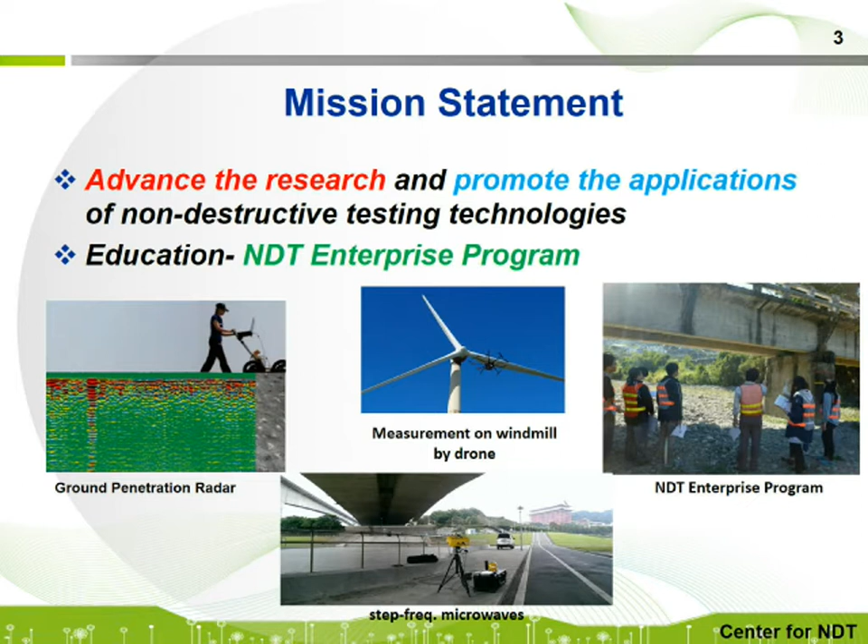The mission statement. There are two missions for our center. The first one is to advance the research and promote the applications of non-destructive testing technologies. The second one is education, which refers to the NDT Enterprise Program. General information. First, I would like to talk about the history and the revenue.

The Chaoyang University of Technology was founded in 1994. Because several professors in our department have specialties related to civil NDT, we started the Center for NDT in 2005. In 2014, the name of the center changed to Research Center for NDT because it became one of the research centers supported by the university. The annual commissioned budget averaged 10 million NT dollars for recent years.

The projects conducted by our center include testing targets of tunnel, embankment, bridge, reservoir, building, pier, nuclear power station, wind turbine, highway, and airport. So they are very versatile. There are 7 main researchers in our center. Professor Chen, Professor Shi, and Professor Chang. Their specialties are in structural NDT and structural health monitoring.

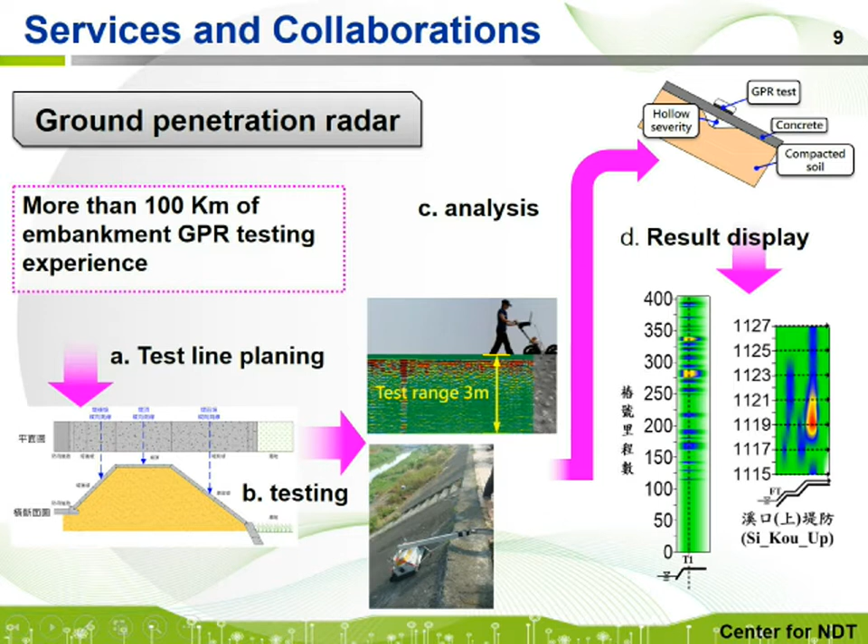An instrument called IBIS, which is a step frequency microwave interferometer, is used for bridge monitoring. IBIS can simultaneously measure the dynamic displacement of multiple points on the bridge deck. The accuracy is 0.1 mm to 0.01 mm, and the data acquisition frequency can go up to 200 Hz. So, if we monitor the vertical displacement of normal traffic for 20 minutes, the bridge modal frequency and the mode shape can be obtained.

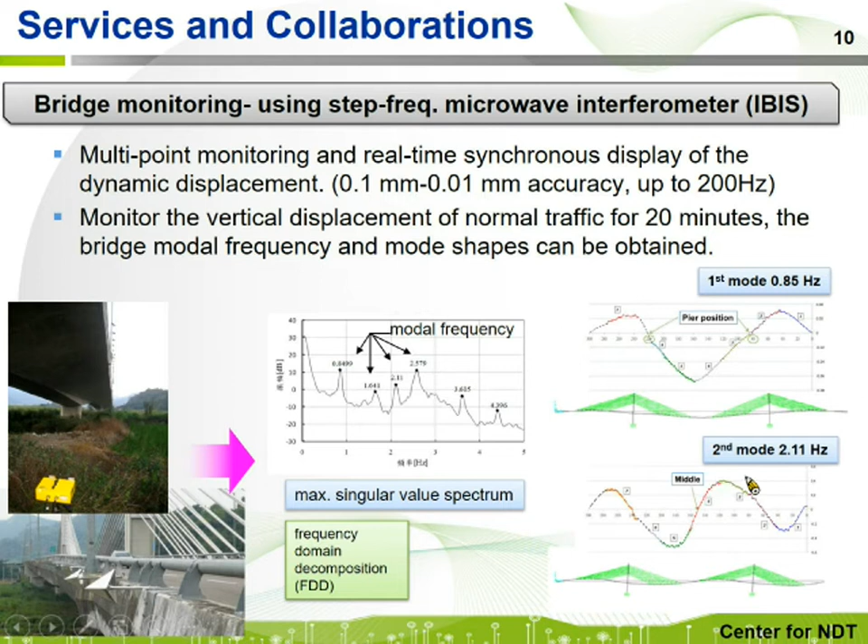We use multiple methods for tunnel assessment. We use ground penetrating radar to assess voids beneath concrete lining and use LiDAR scans to monitor the tunnel deformation, using dynamic photography and the LiDAR scan data to create the unfolded view of the anomalies in the tunnel.

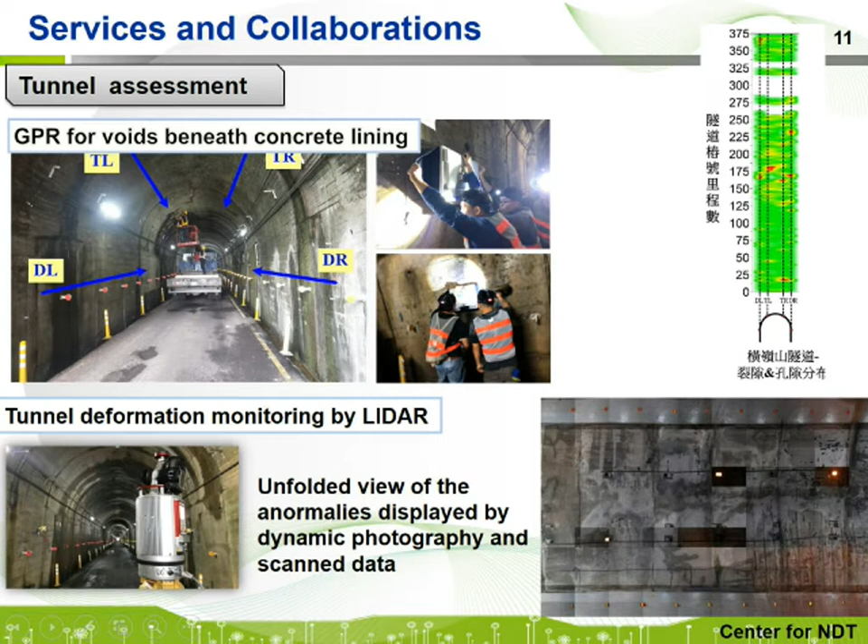For the wind turbine structural safety assessment and monitoring, two non-contact monitoring methods were applied. We use a UAV carrying an infrared camera and a regular camera to fly around to visually inspect damages on the pillar and rotor. And we use the microwave interferometer placed under a pillar to check the mode shape and the vibration mode frequency of the pillar.

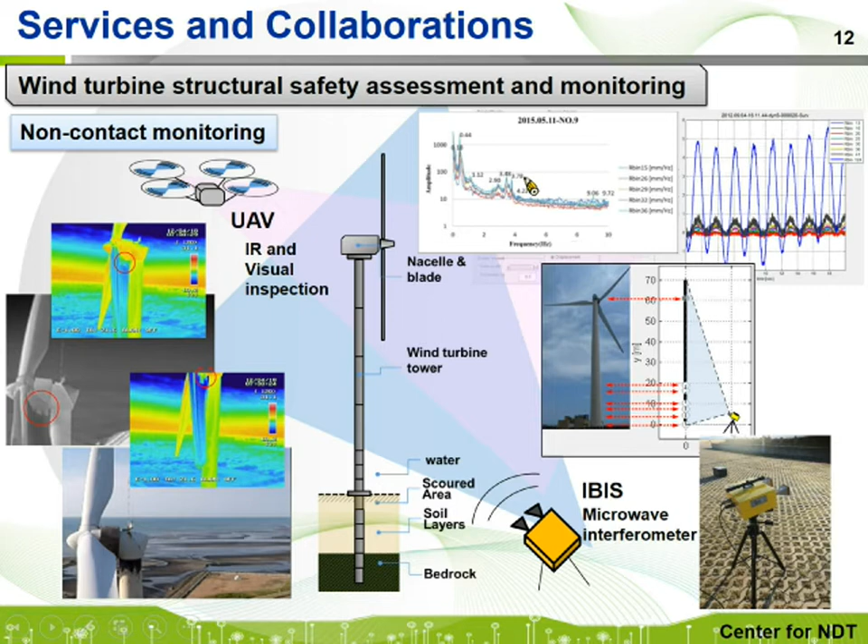I would like to introduce two innovative stress wave methods developed in our center to assess the debonding at the steel-concrete interface, for cases such as concrete-filled steel tube damaged by fire, and not fully filled epoxy resin for factory floor strengthening by steel plate, or the weir strengthened by steel plate.

One method is to place the small hammer impactor away from the receiver to obtain the Lamb wave modal vibration and use the difference of the A0 mode dispersion curve of the steel plate to assess the debonding. The second one is to place the hammer close to the receiver and use the amplitude of the peak in the normalized amplitude spectrum to examine the voids underneath the steel plate.

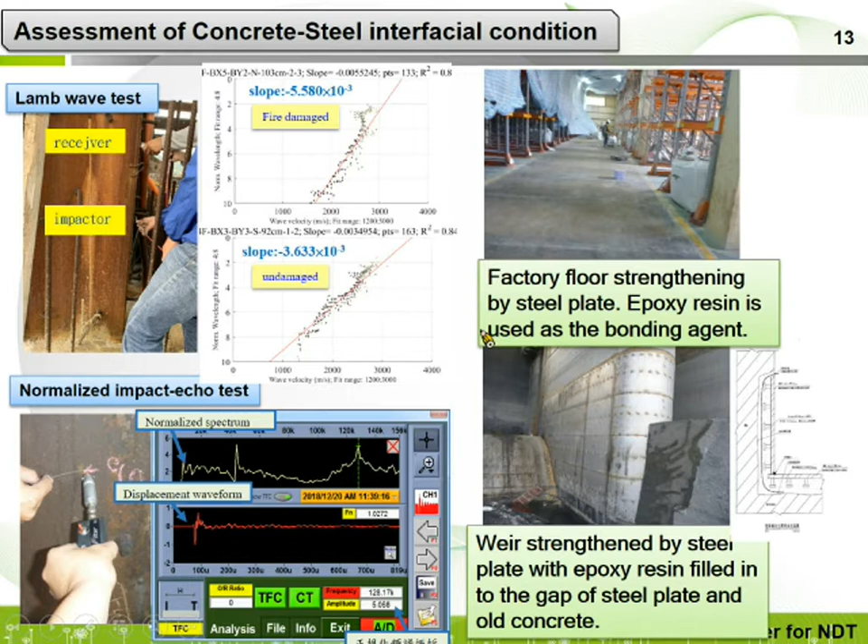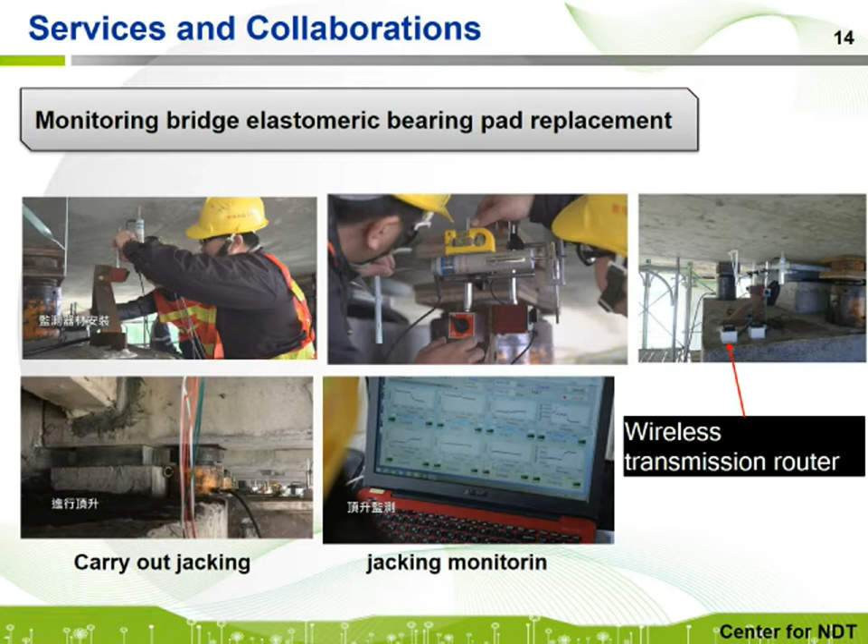Conducted many cases of monitoring replacement of bridge bearing pad during jacking up the bridge girder. Worth to mention is that wireless transmission routers were applied to transmit signals of the displacement sensors to the computer, so that the monitoring becomes quite easy without connecting a large number of electric wires.

For the ongoing research projects, first is the project funded by the Ministry of Science and Technology. In the project, we assessed the depth of the damage for the reinforced concrete after fire using the dispersive characteristic of Rayleigh wave group velocity. We use one impacting hammer and a displacement receiver or a microphone to obtain the Rayleigh wave, and use short-time Fourier transformation and reassign method to obtain the dispersive curve. And after the proper inversion process, we can get the velocity profile with respect to depth. So the damage depth after fire can be assessed.

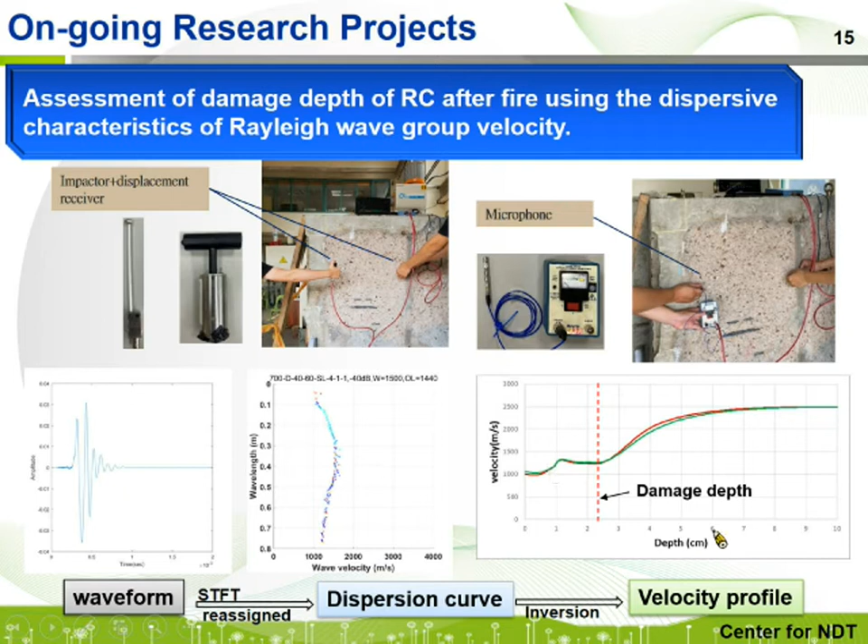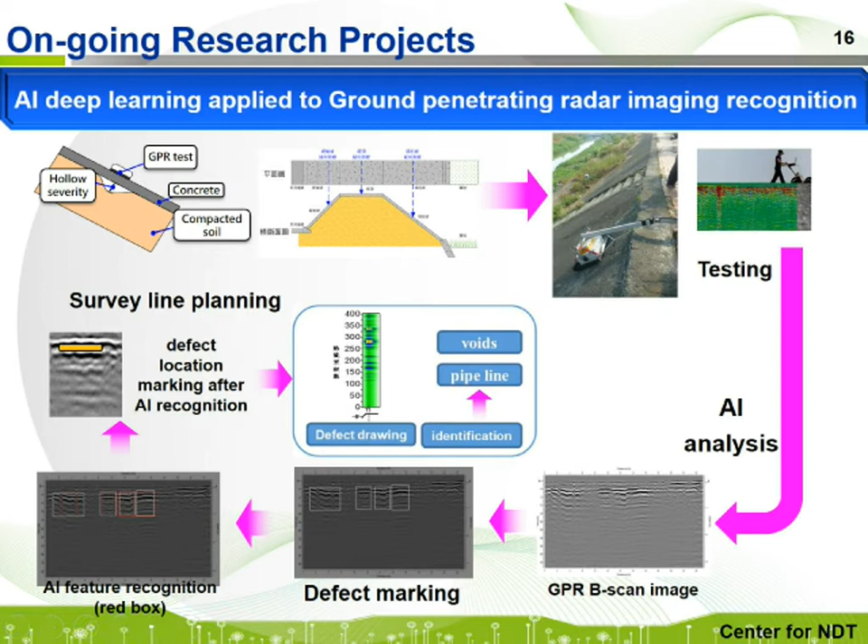Second project is funded by National Chung-Shan Institute of Science and Technology, using AI deep learning on ground penetrating radar imaging recognition for embankment assessment. Ongoing research project is to apply digital image correlation (DIC) to monitor wind turbine pillar. The preliminary research was conducted in lab using 2 digital cameras to measure the 3D movement of a pillar with multiple marks and multiple defects, using the modal difference index to identify the severity and the location of the defects.

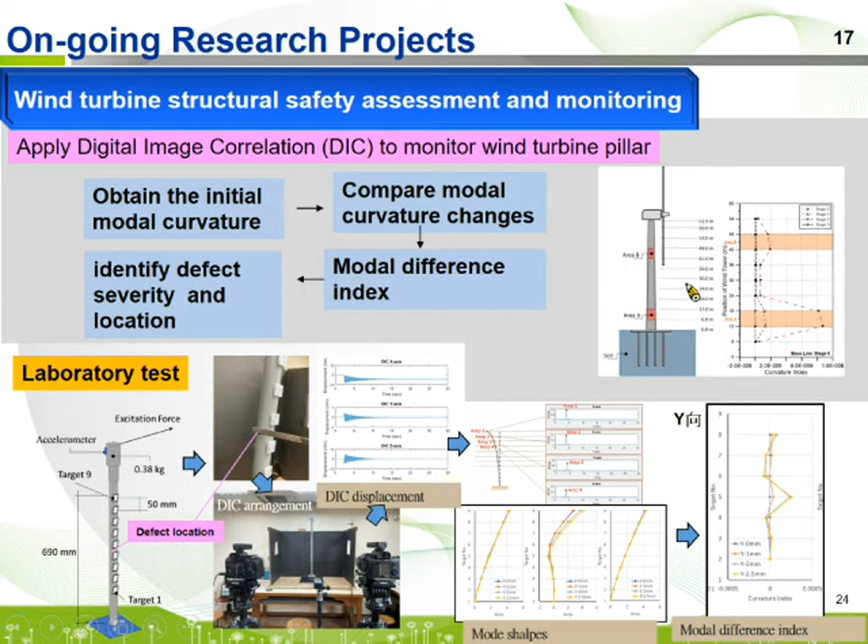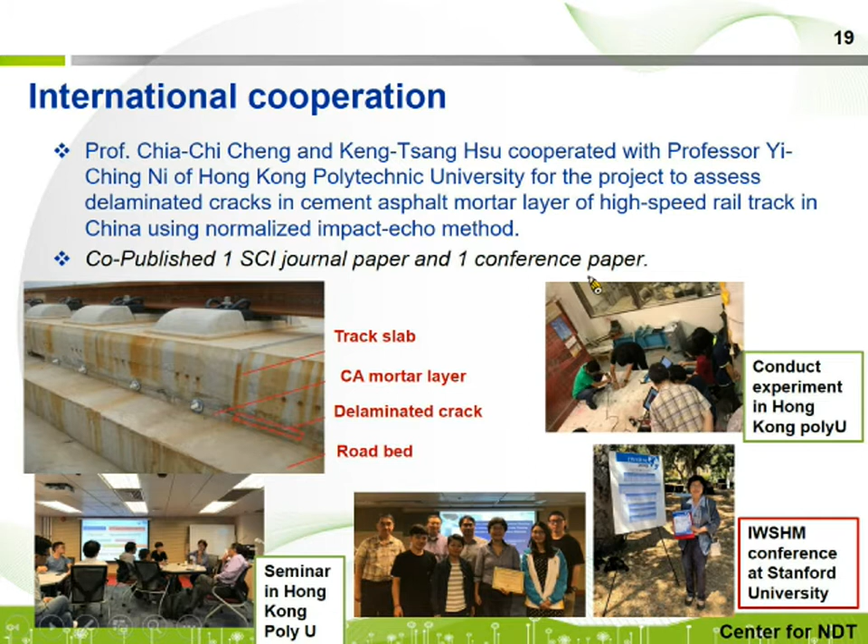For the international cooperation, Professor Chia-Chi Cheng and Keng-Tsang Hsu cooperate with Professor Yi-Ching Ni of Hong Kong Polytechnic University for the project to assess the delaminated cracks in cement asphalt mortar layer of high-speed rail tracks in China using normalized impact echo method. So we went to Hong Kong Polytechnic University to conduct experiments, and Professor Chia-Chi Cheng offered a seminar with the group in Hong Kong Polytechnic University. Also, we have published one SCI journal paper and attended a conference at Stanford University and published one conference paper.

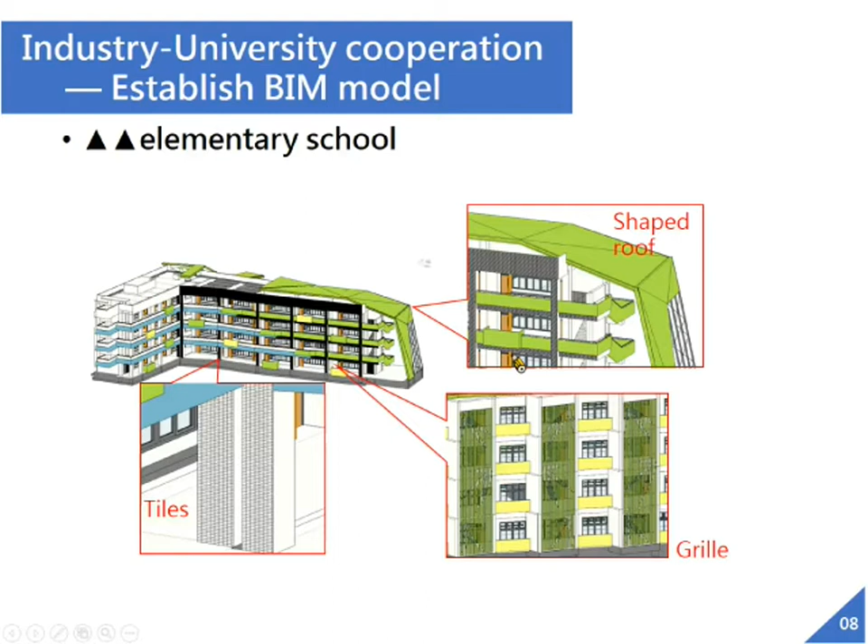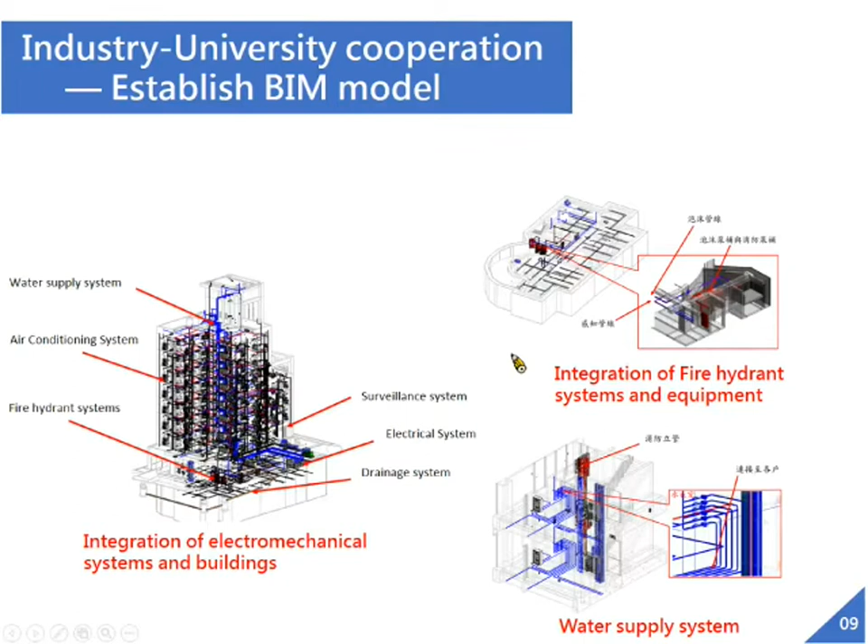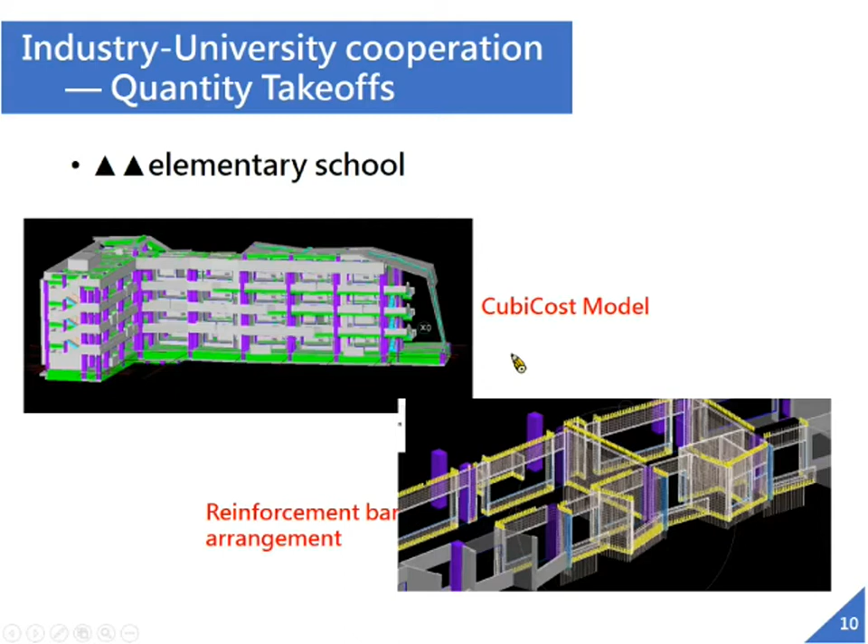This is a case about BIM model establishment. The general contractor used the BIM model to detect the clash and discuss the details of the building, like the tiles, like the shaped roof. What is more important is the integration of the electromechanical model and the structural model. It is because the electromechanical engineering is more complicated than structural engineering in practice. So with the BIM model, all parties can understand in advance how to arrange the electromechanical pipelines. In addition to viewing 3D models, BIM model can also be used for quantity takeoffs. The calculation result can assist the owner or the general contractor to evaluate the project budget quickly.

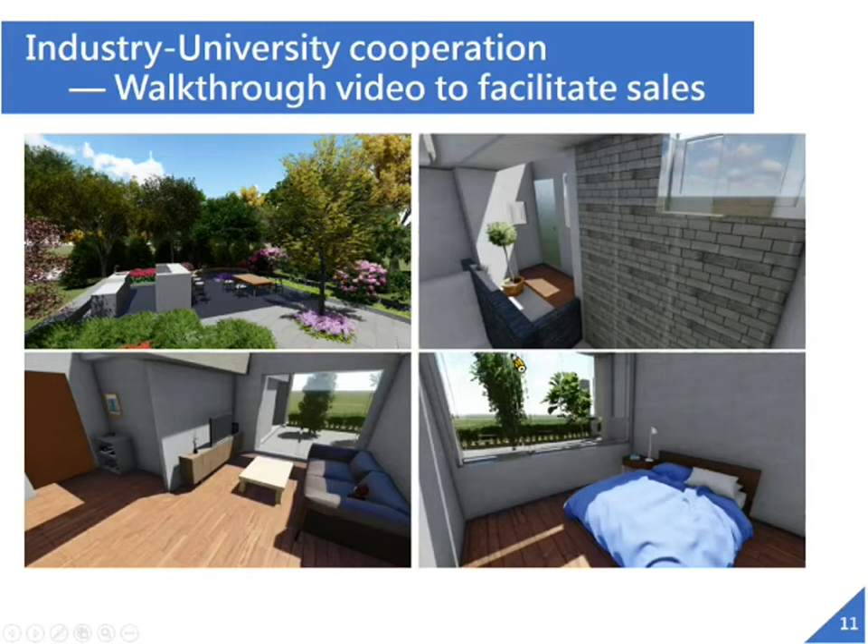And the 3D animation is also an important function of BIM. It can show the expected view and environment, and this can help the owner or the customer foresee the building before completion. Here we have a video showing the 3D animation made from the BIM model.

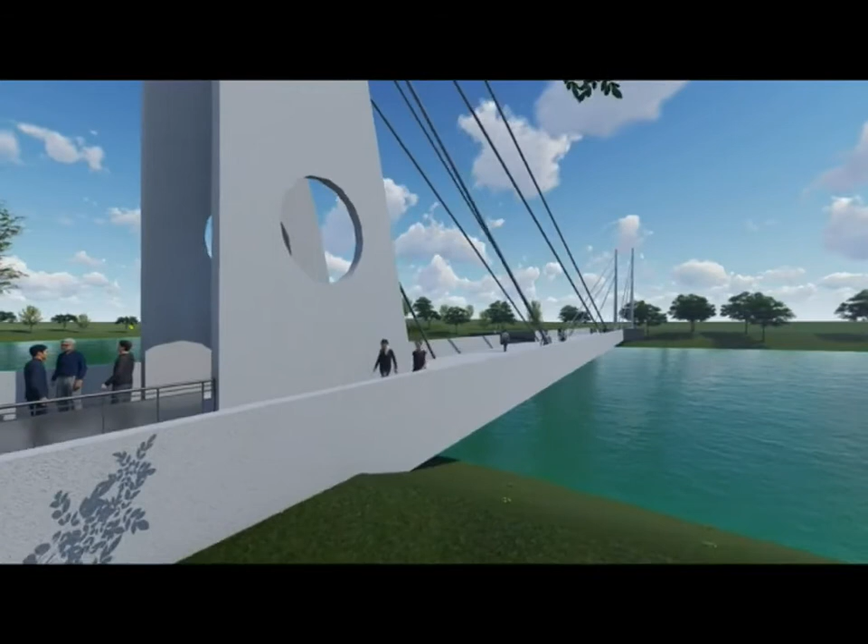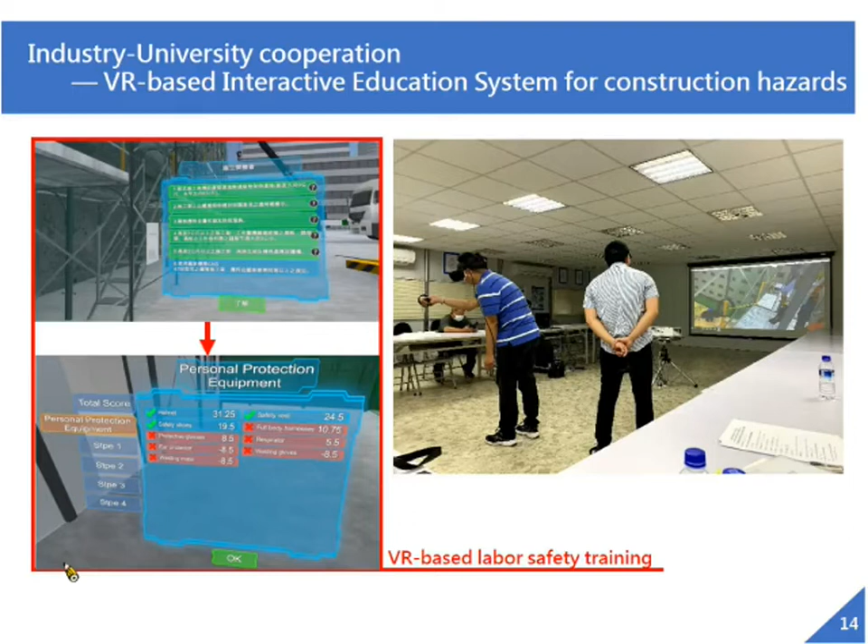Okay, in addition to BIM, our center is also actively developing VR-related technologies. We developed a VR-based interactive education system for construction hazards. By using this system, laborers on the construction site can learn hazard knowledge with a realistic scene. This is a part of the system showing the VR environment. We can see the video below to learn more.

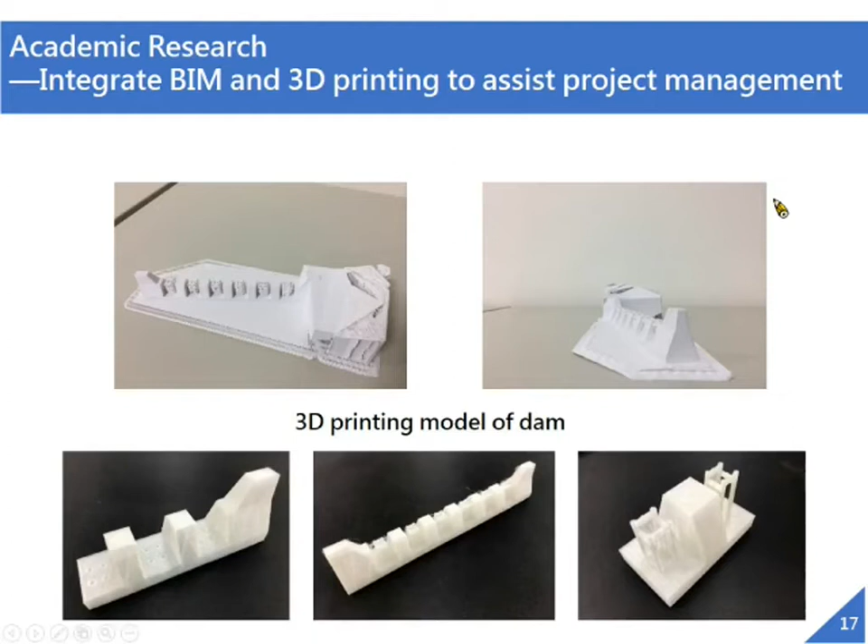It's an important part, and now we move to the second part, academic research. Our research is BIM and VR related. We'll introduce some of them below. This one is about integrating BIM and 3D printing. We try to transform a BIM model into a 3D printing model. When we print the virtual model out, the laborers can discuss how the facilities can be assembled, so it can facilitate the construction process.

Also, we developed a BIM and VR-based cost estimation system. When a change order occurs in a construction project, we usually need almost 2 weeks to estimate the cost of the change order. By using this system, customers can see the changes in the VR environment directly, so that the customers can know if the changes meet their requirements or not. When the change is done, the cost of the changes can be calculated automatically, so it can save lots of time.

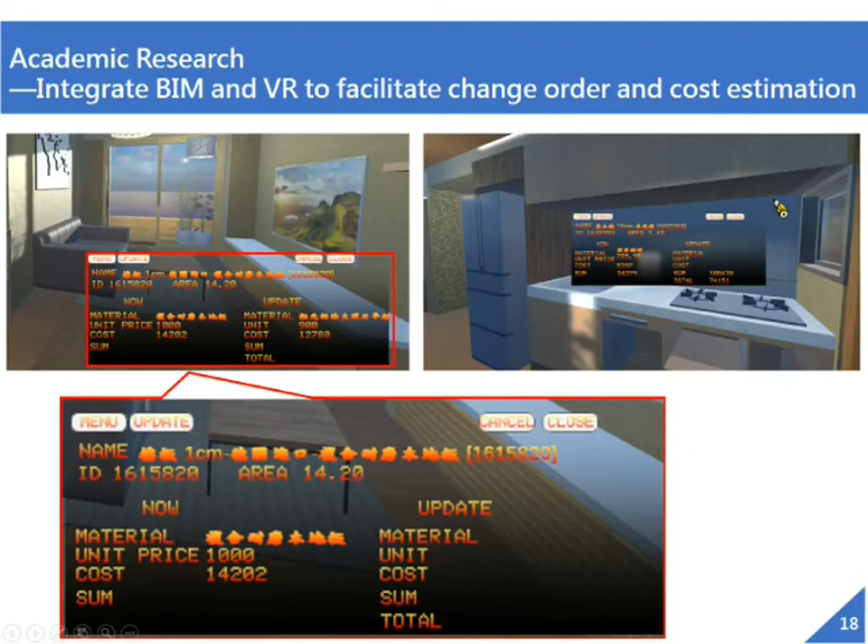In the study of 5D simulation based on BIM and VR, a cost and schedule management model is developed. First, a BIM model is linked with the schedule activities to simulate the construction process. Then the cost items are integrated into the 4D simulation to develop the progress curve. In addition, this research further presents the model in the VR environment.

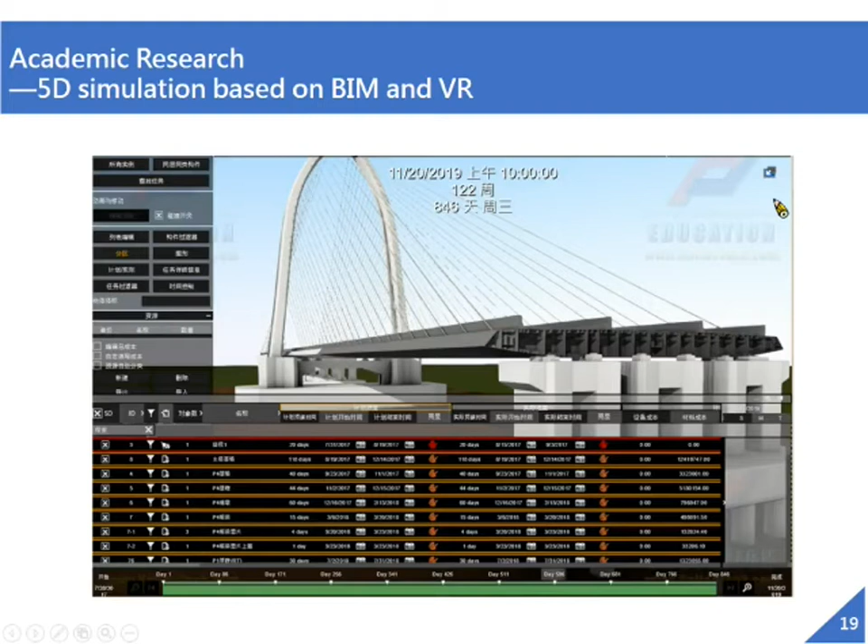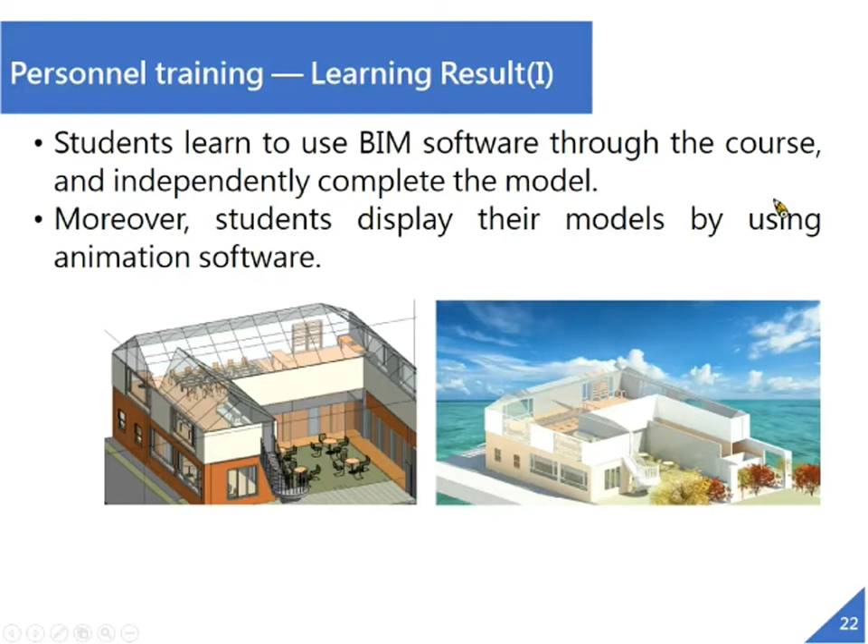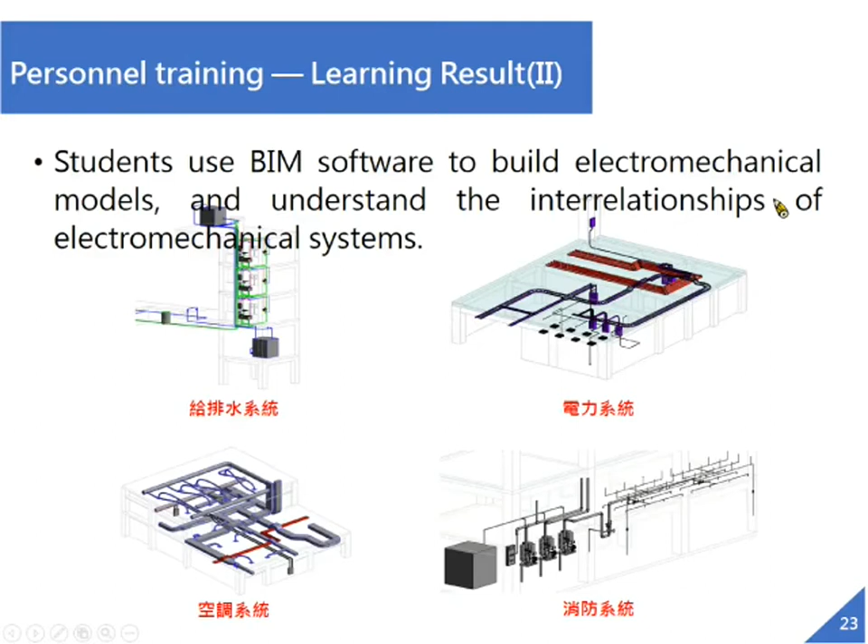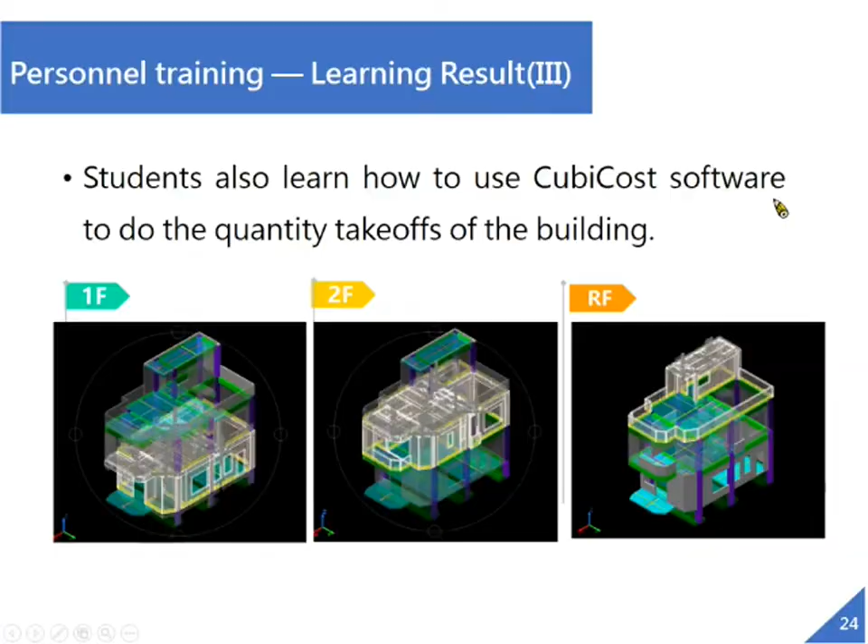Also, students use the Cubicost quantity takeoff software. They build a BIM model and then do the quantity takeoff to calculate the cost of the building model. That's all about the BIM Center in the Department of Civil and Construction Engineering.

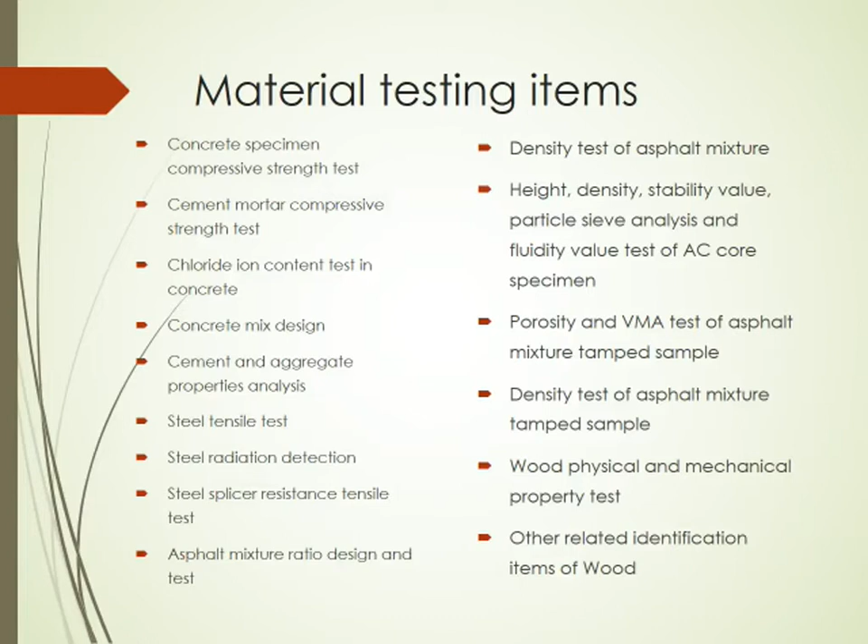Material test items. Now we're doing concrete compressive strength tests, cement mortar compressive strength tests, chloride content tests in concrete, concrete mix design, cement and aggregate property analysis, steel tensile tests, steel radiation detection, steel splicer resistance tensile tests, asphalt mixture ratio design and tests, and all the other items.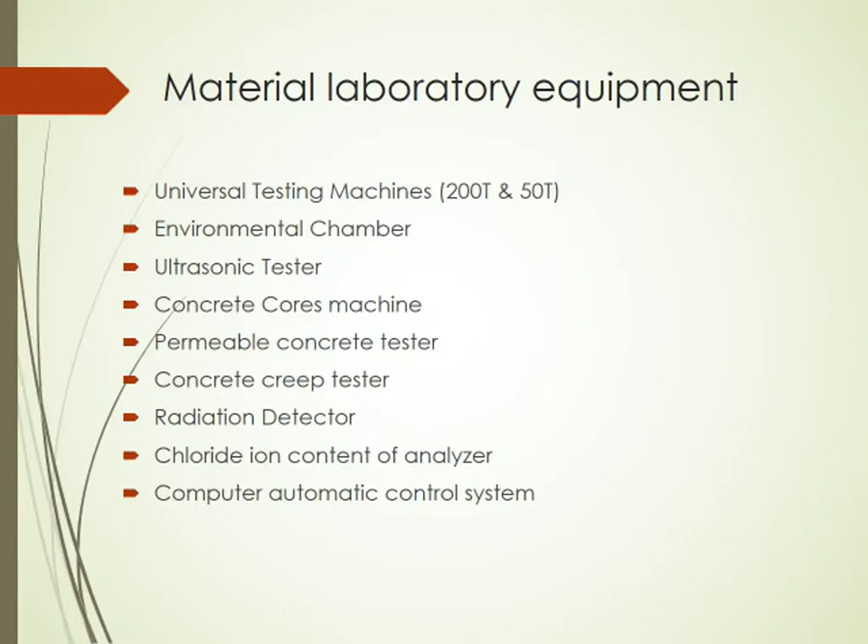Now we introduce our universal testing machines, 200 tons and 50 tons. A universal testing machine is a machine that allows samples to be tested in pure tension or pure compression. The universal machines in the materials lab have several different couplers that allow different types of loading conditions.

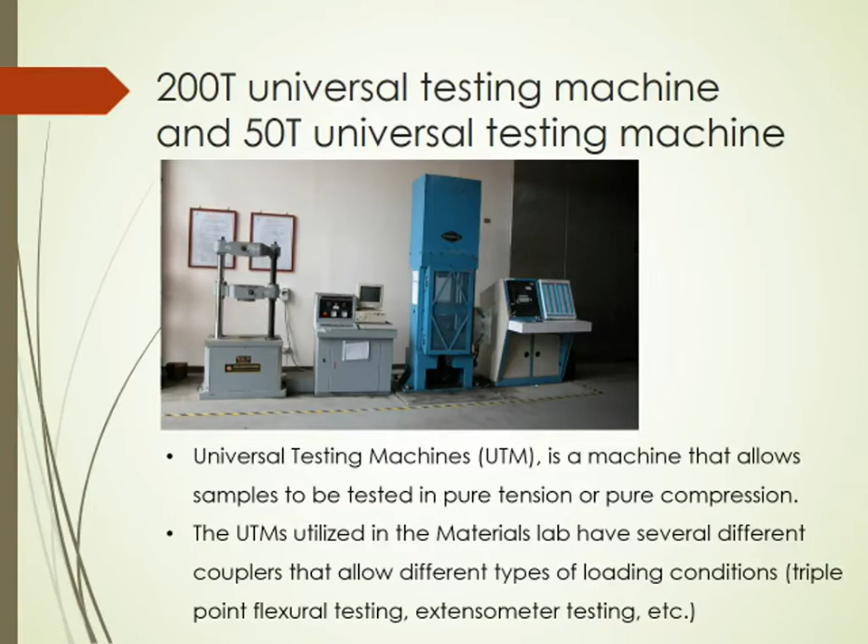Environmental chamber. The environmental chamber is capable of controlling temperature as well as humidity. It has a temperature range of -4 to 212 degrees Fahrenheit, with a temperature constancy of ±0.5 degrees Fahrenheit. The chamber also has a humidity range of 10 to 95%, depending on ambient temperature and humidity, with an accuracy of ±2.5%.

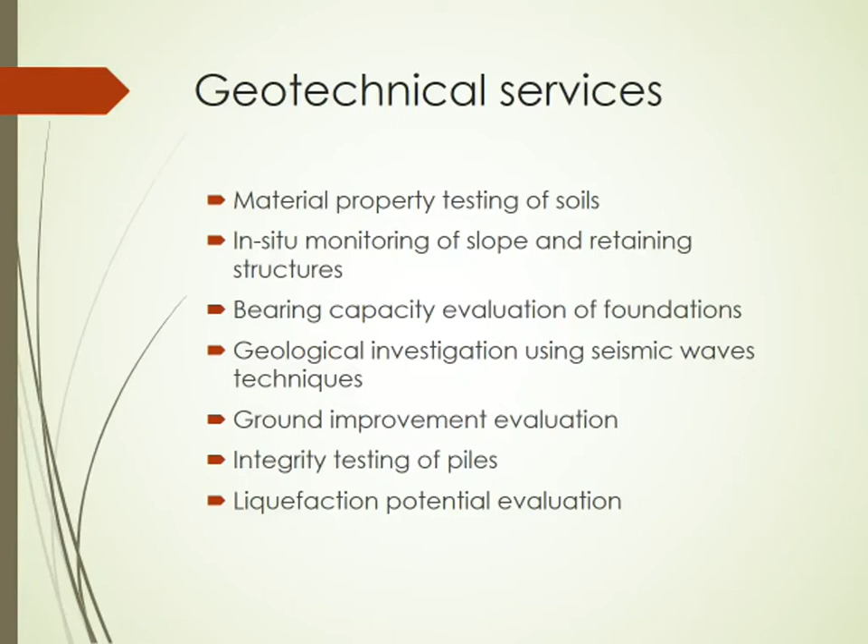Now let's talk about our geotechnical services. We have material property tests of soils, in situ monitoring of slopes and retaining structures, bearing capacity evaluation of foundations, geological investigation using seismic wave techniques, ground improvement evaluation, integrity tests of piles, and liquefaction potential evaluation.

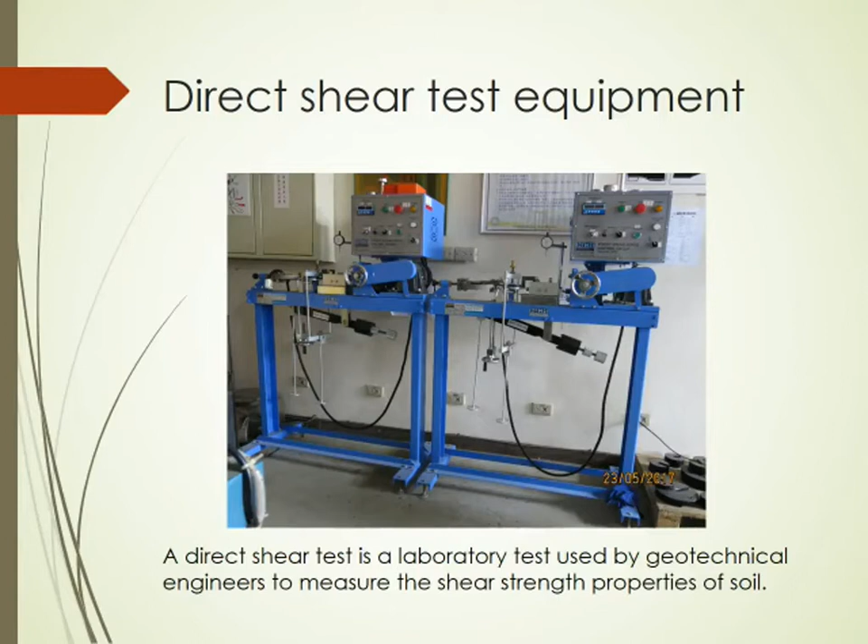This is direct shear test equipment. A direct shear test is a laboratory test used by geotechnical engineers to measure the shear strength property of soil. Triaxial compression test. The triaxial test of soil is widely used in geotechnical engineering. Specimens are axially loaded to failure while a confining pressure is constantly applied. As a result, the behavior of geomaterials is investigated in the three-dimensional stress state.

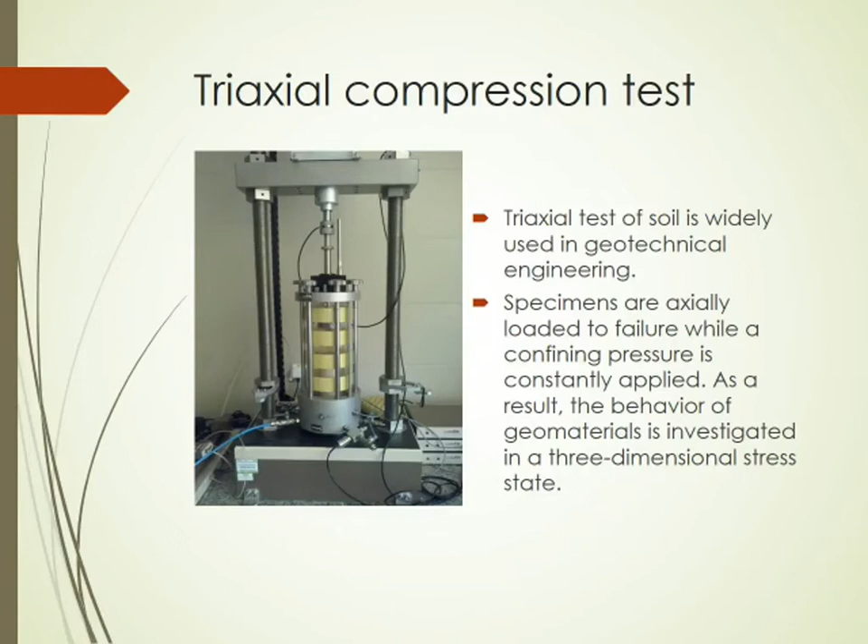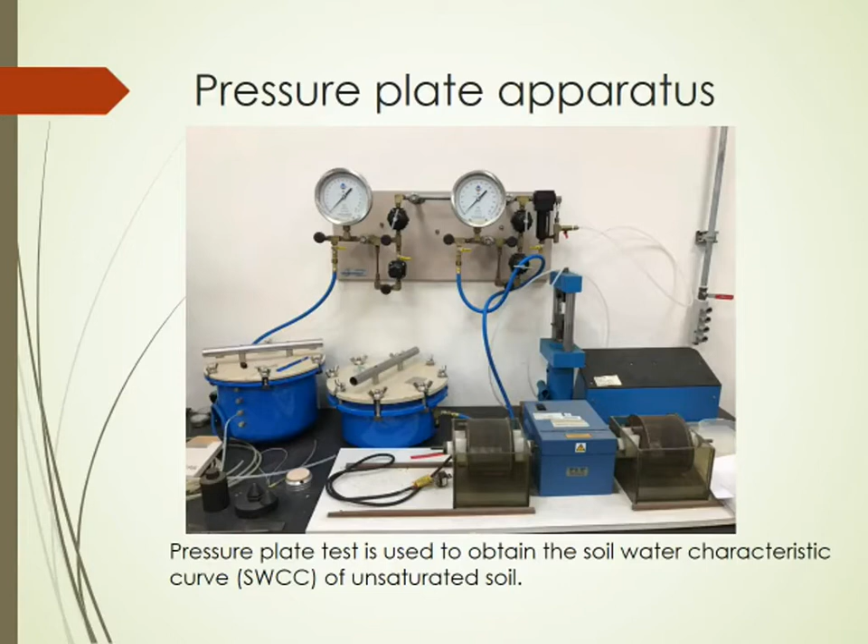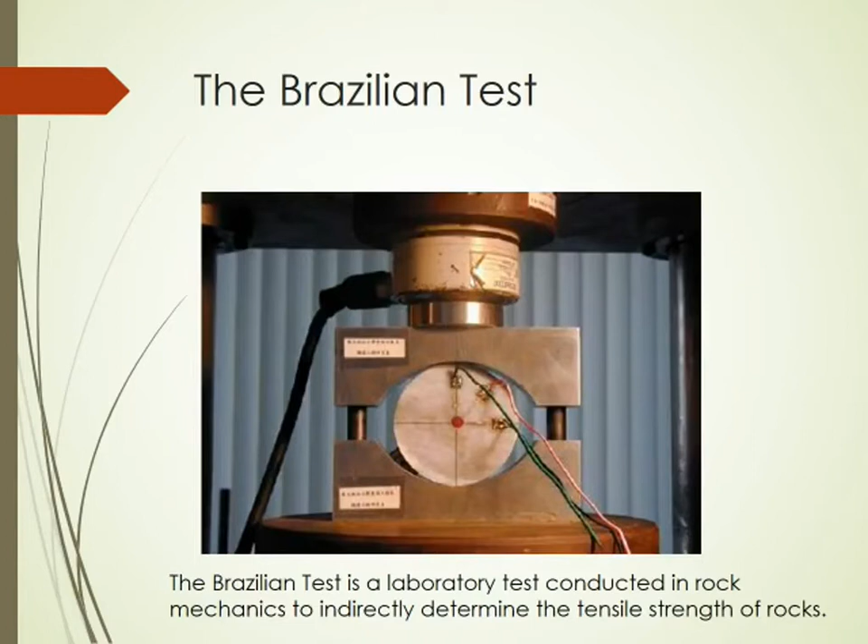This is pressure plate apparatus. The pressure plate test is used to obtain the soil water characteristic curve of unsaturated soil. The Brazilian test. The Brazilian test is a laboratory test conducted in rock mechanics to indirectly determine the tensile strength of rocks. Ground resistivity test equipment. The ground resistivity test is a process of measuring electrical resistivity of soil to determine the conductivity of the soil.

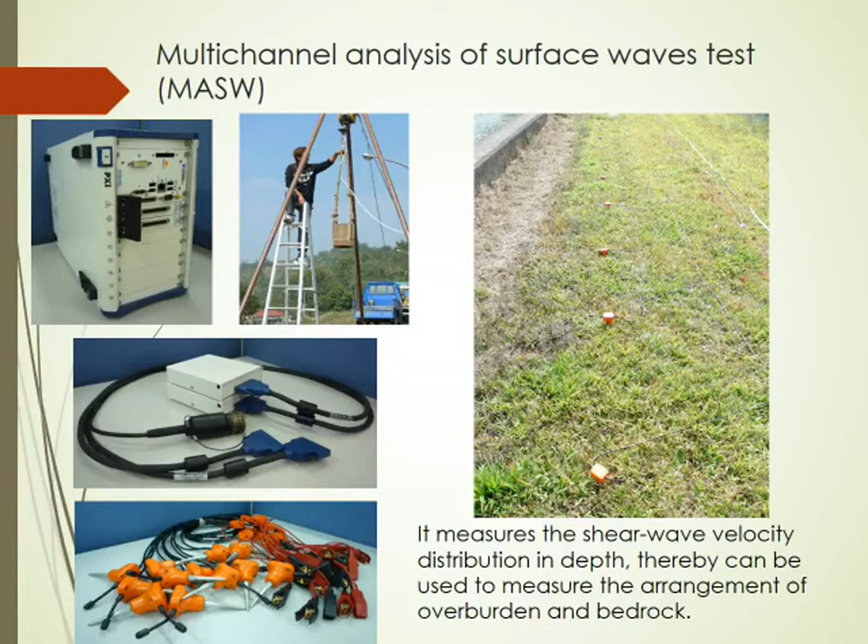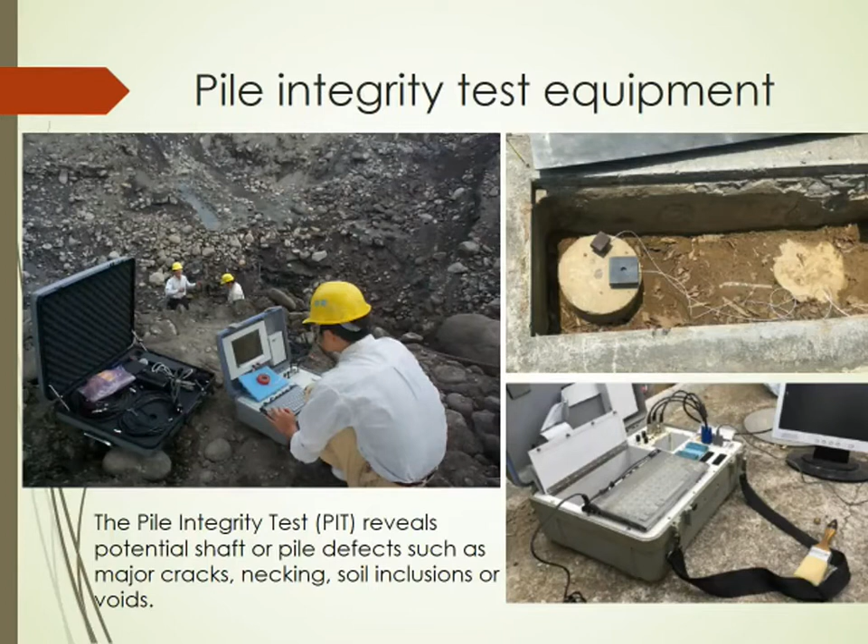Multi-channel analysis of surface wave test. It measures the shear wave velocity distribution in depth, and thereby can be used to measure the arrangement of overburden and bedrock. This is pile integrity test equipment. The pile integrity test reveals potential shaft or pile defects such as major cracks, necking, soil inclusion, or voids. This is a prototype debris flow simulator. It simulates and studies the effect of various prevention facilities on the debris flow.

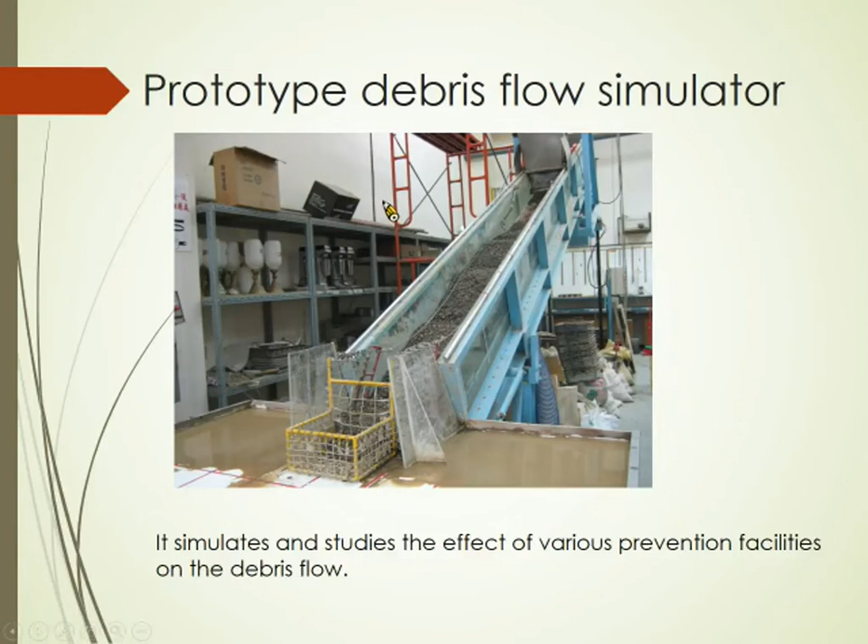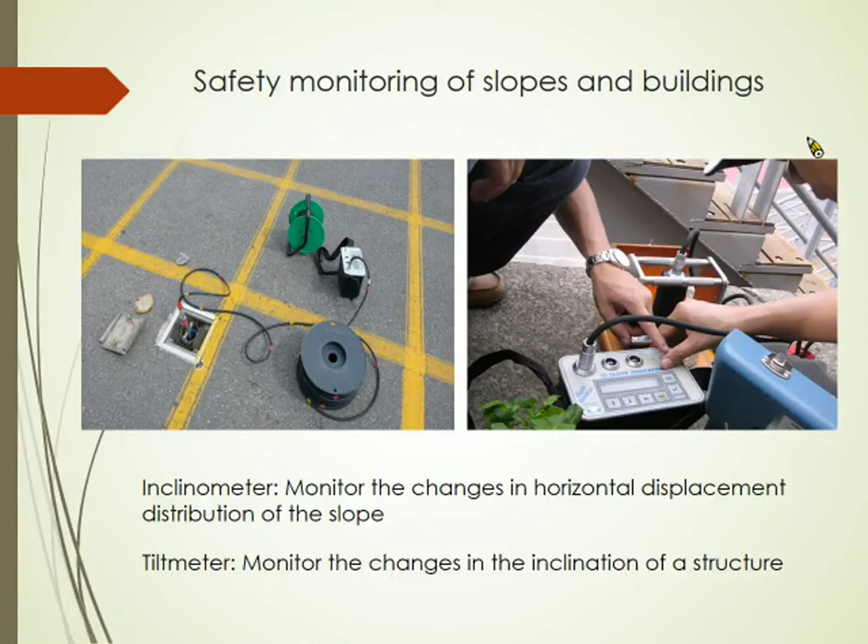This is safety monitoring of slopes and buildings. The first picture right here is an inclinometer. It monitors the changes in horizontal displacement distribution of the slope. And the second meter is a tiltmeter. It monitors the changes in the inclination of the structure.

Now I introduce our structure laboratory. Our structure laboratory is equipped with a 20 meter by 10 meter by 70 centimeter reaction slab and an 8 meter, 7.2 meter, 1 meter reaction wall, which provide the vertical and horizontal loading reaction supports for large-scale structural load tests. The overhead crane system with 14 meter clear height and a 20 ton capacity is also equipped for transporting large specimens.

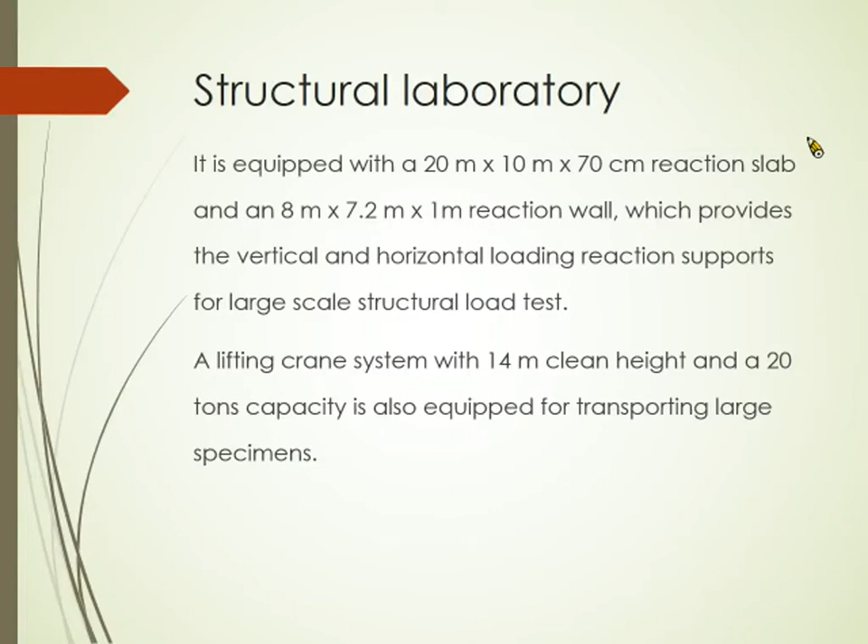As you can see, this is our 135 ton, 4.5 meter clear height scaffold loading system. Here's the scaffold loading test video. You can watch right here. The vertical bar in the lower right corner will buckle. Okay, the buckling happened right here.

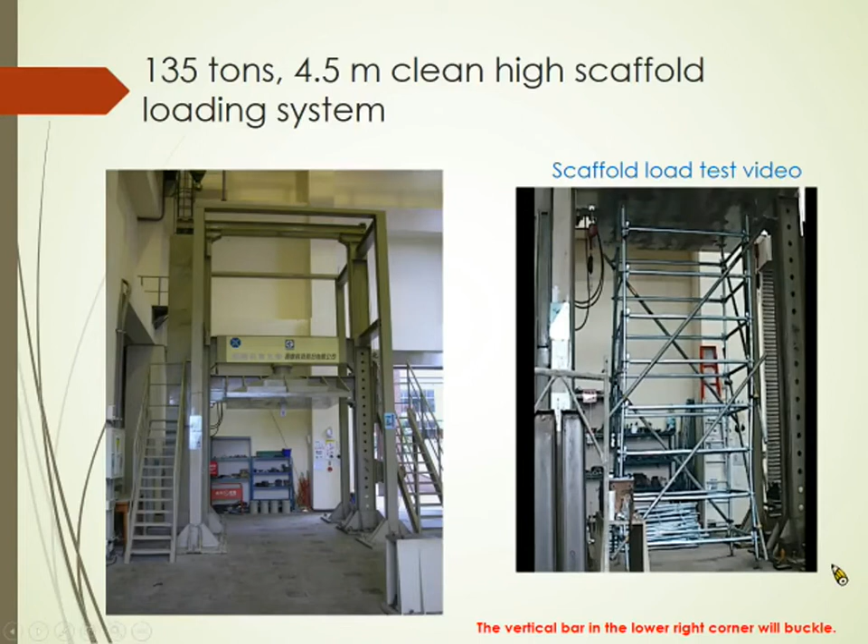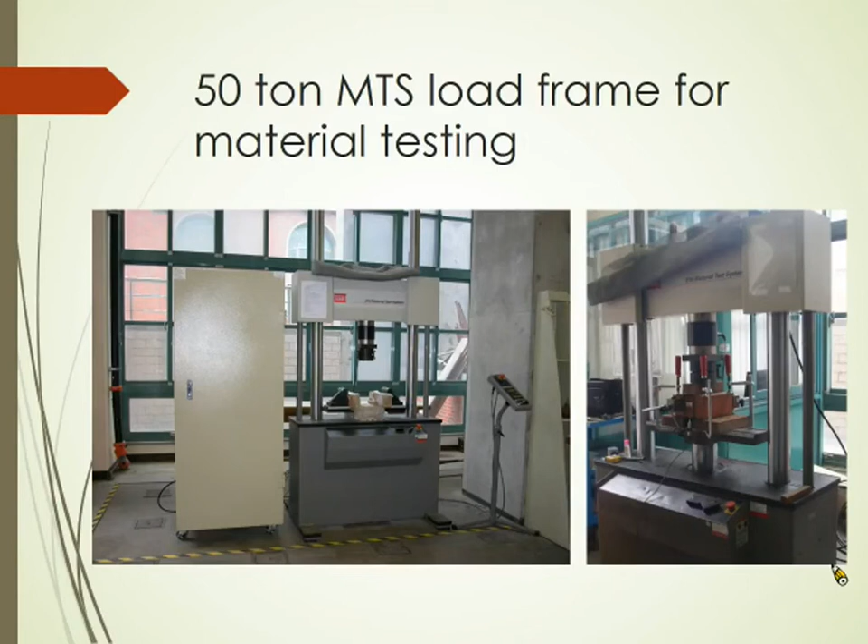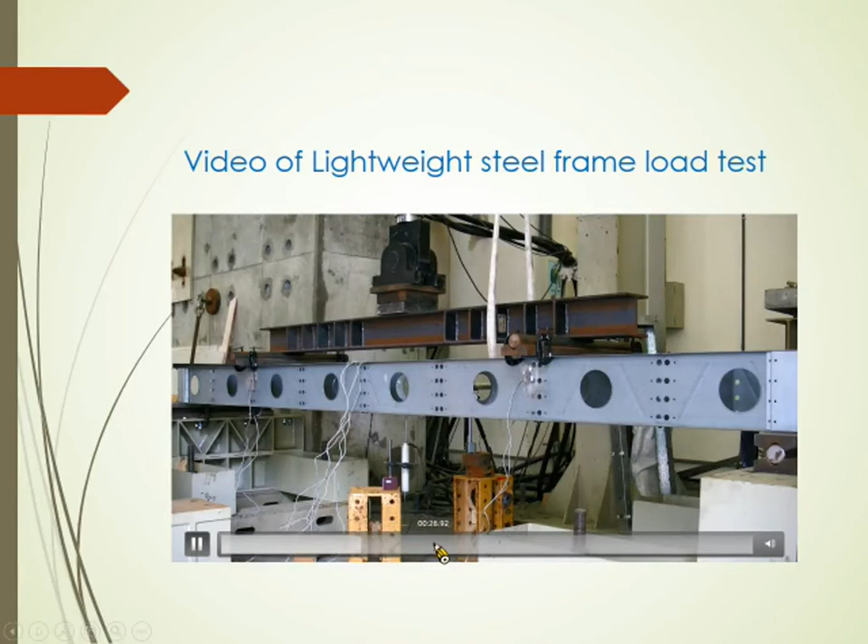Now, this one is our 50 ton MTS load frame for material testing. And this one is the 50 ton MTS actuator for structural tests, right here. Okay. Now, let's see the video of a lightweight steel frame load test using our 50 ton MTS. Now the pressure is coming to 20 tons. Yeah, you can see. Yeah, the buckling right here. Okay, the breakdown.

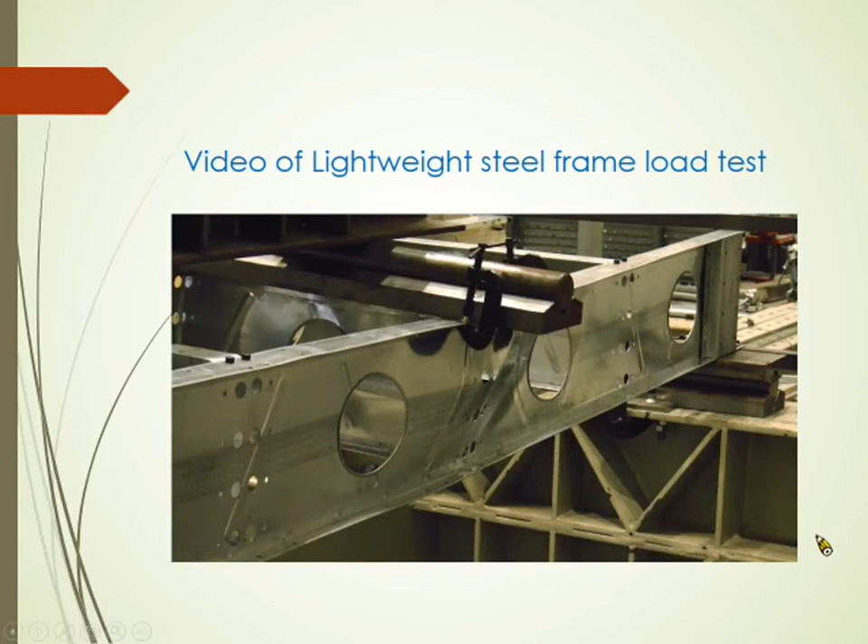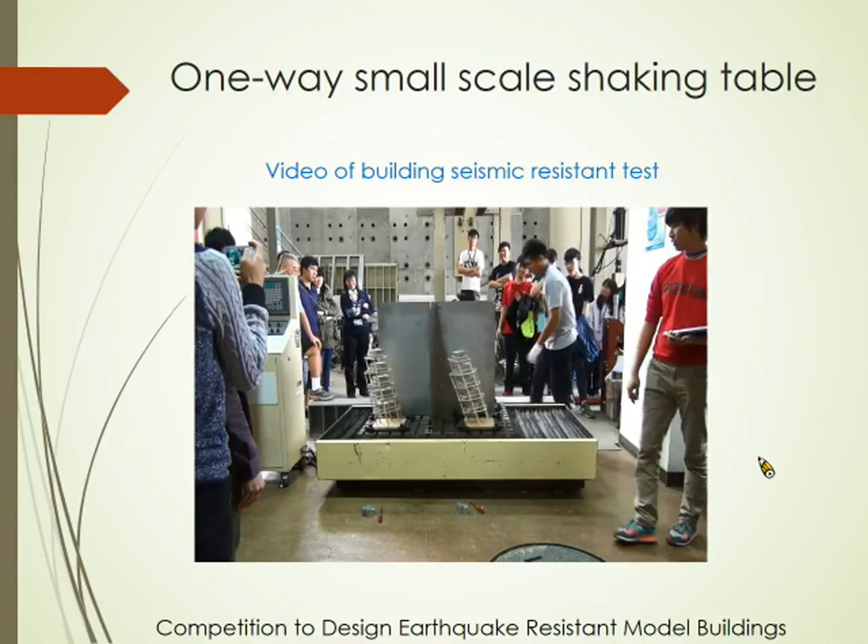Now this one is our one-way small scale shaking table, and this video is a building seismic resistance test. It's a competition to design earthquake resistant model buildings. Now, doing the correction. And now go 3, 2, 1. Start it. It only goes one way, left to right, left to right. Now go to the end. Now it's shaking a lot. Okay, one broke in the back, and this one also broke down, and this one is still safe.

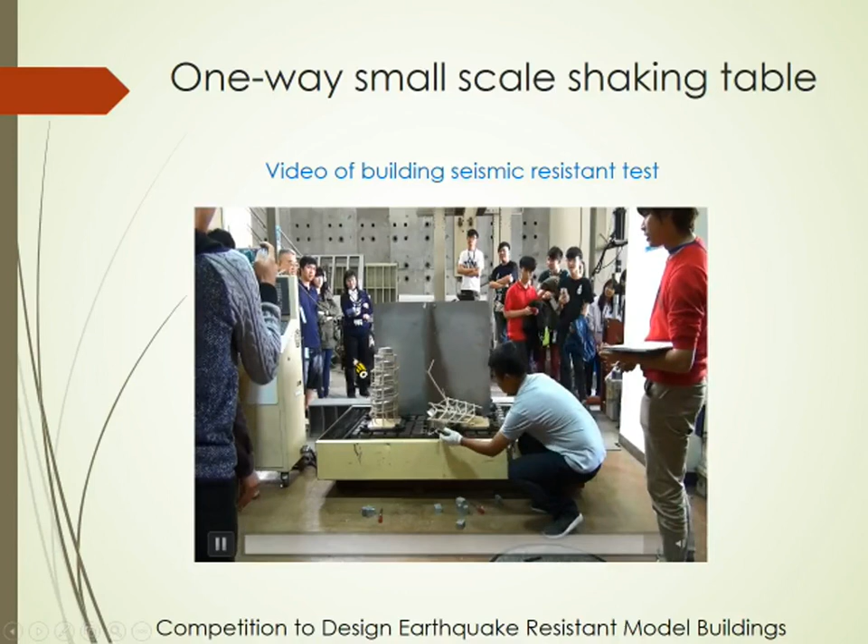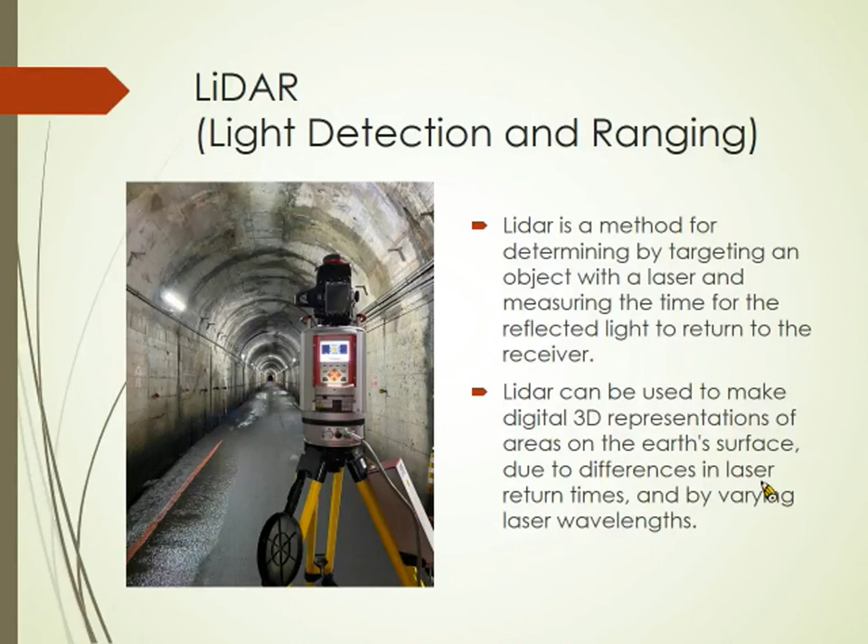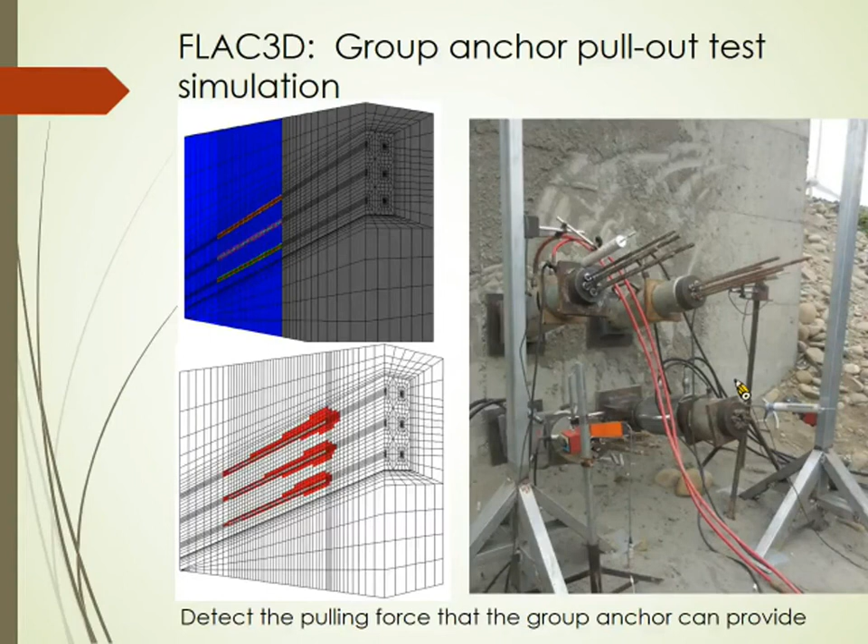Now this one is FLAC 3D, a group anchor pull-out test simulation. It can detect the pulling force that the group anchor can provide. Now you see the first one, this one is STED. It can calculate the safety of the slope based on the limit equilibrium method. And the second one, this one, is TORSA. It's about wall stability analysis of the excavation.

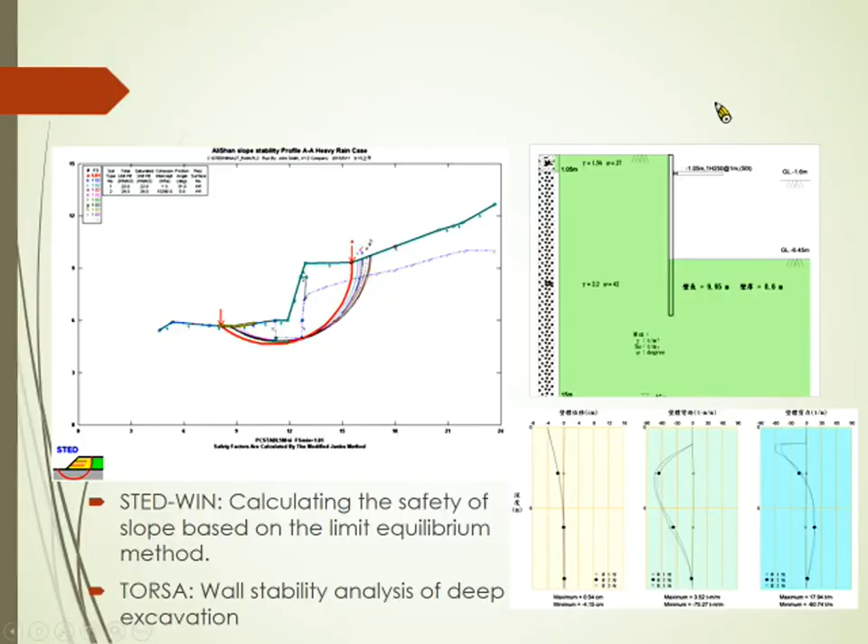Okay, now I'll make a brief conclusion. These three centers and their members have contributed tremendously to the development of our department. Therefore, academia-industry collaboration and government funding both support the faculty members and the students to publish their research in well-known journals. You are welcome to join us whenever you want. Scholars are welcome to visit our department, and students to apply for master's and doctoral programs.